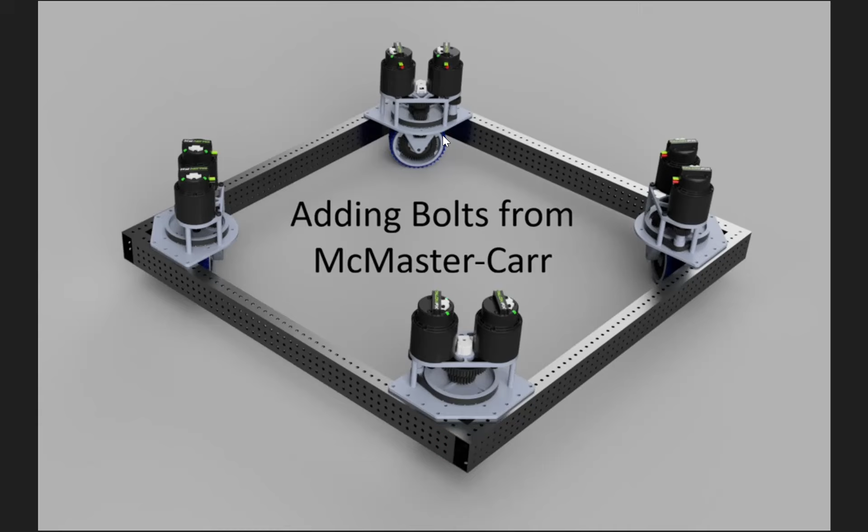This video, we're going to download some models of some bolts from McMaster Carr, which is the Bunnings of America, and we're going to insert these into the design to bolt these swerve modules into place.

At the moment, you can see our swerve modules are held in place. We can't move them around, but there's no bolts in this model holding it in. We want to try and model everything we're going to use in our robot to see whether things are going to get in the road later on.

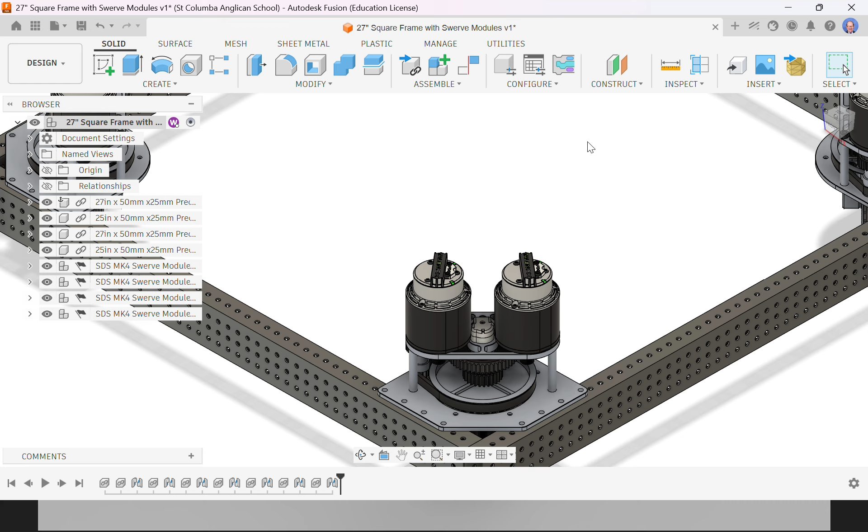So to insert a component, we go up to the Insert menu, and then we can go to McMaster Carr Component. This is where we can then filter down on these bolts. First of all, we need to know what type of bolt we actually need to insert here.

So we're going to go back to the Swerve Drive Specialties website, and we're going to find our swerve module, which is this one here. Going to see if we can find a drawing of this swerve module. There we have a layout drawing, PDF drawing.

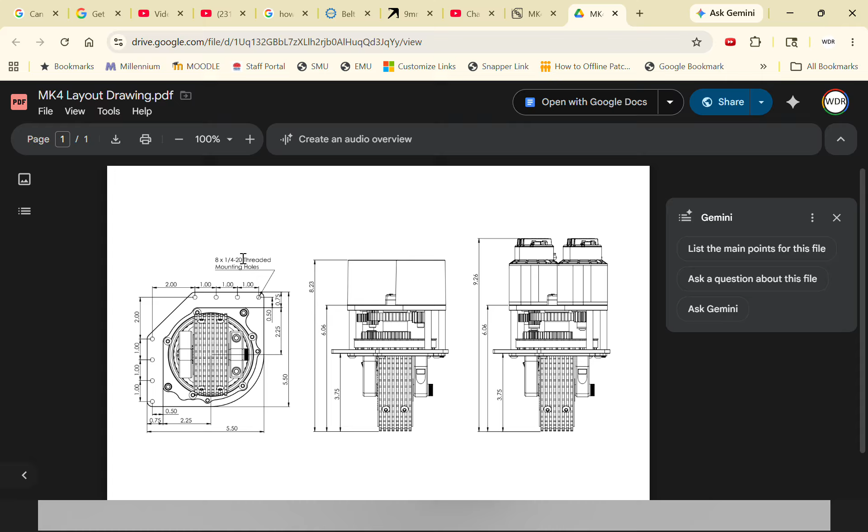And now I can see my holes across here. They're 1 inch apart, and they're 8 lots of 1/4-20. What that means is 1/4 of an inch wide and then 20 threads per inch. So now that we know that, we can search for that in our McMaster Carr.

Okay, so we want a bolt. We want an inch base bolt. And then this is the thread size, so this is where we have the 1/4 inch 20 - 1/4 inch in size, 20 threads per inch. The next thing down is the length of the bolt.

Now, I've found the bolt that we're going to use, and this is the bolt here. So this is a 2.5 inch long Phillips drive on the end of it, and it's a round head bolt. So we're going to search for that so we can get the CAD model of that in our design.

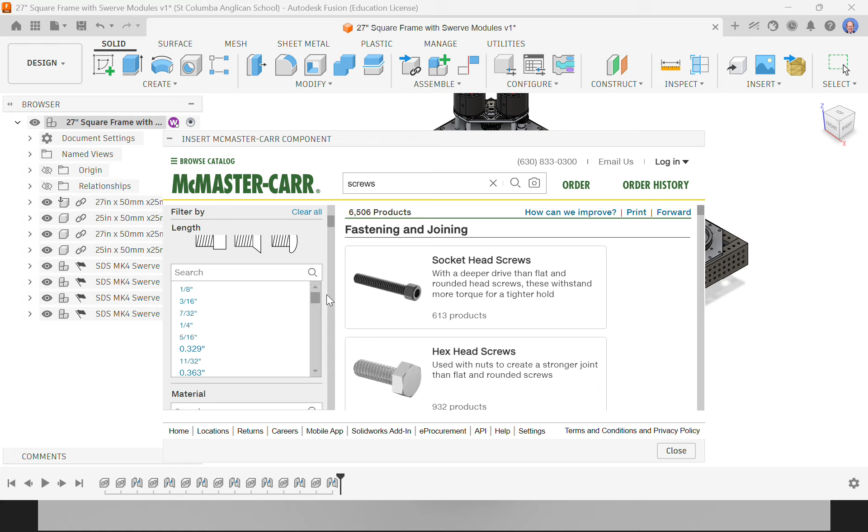So our length is 2.5 inches, and as we do this, the list on the left-hand side here gets smaller and smaller. But at the moment, that's still a lot of things in that list. So we're still going to keep scrolling down here and supplying more information.

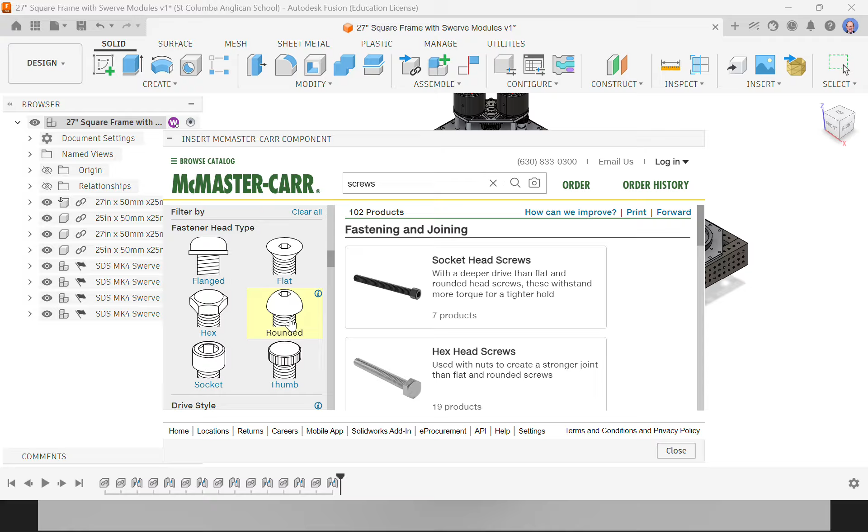Ours is fully threaded. Not sure of the materials, I'm not going to worry about that. It's a rounded head, so I'm going to click that one. It has a Phillips head, which is the screwdriver that goes into it, and it is a round head.

Okay, and now we're actually down to there's only one thing left on the left-hand side over here. And this is, if you were to buy them from McMaster Carr, you could buy a pack of 50 of these for $11.90 in US of A. But then we're not interested in buying them, we actually just want their CAD model.

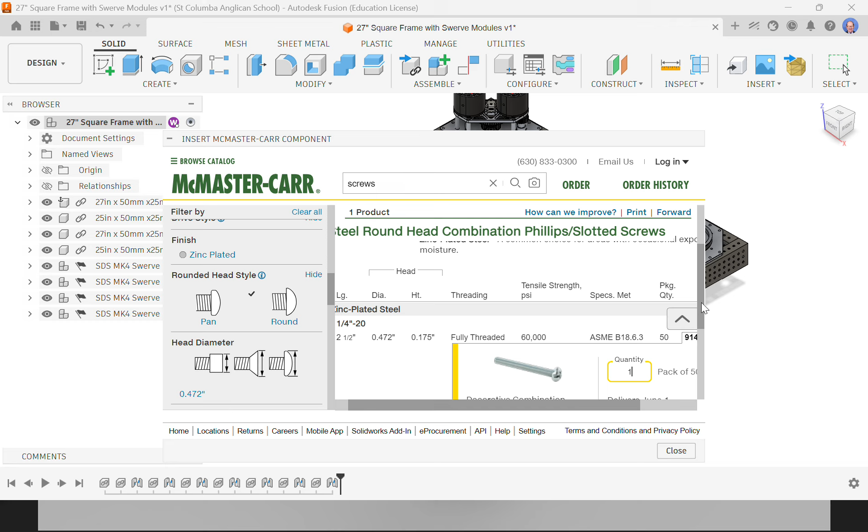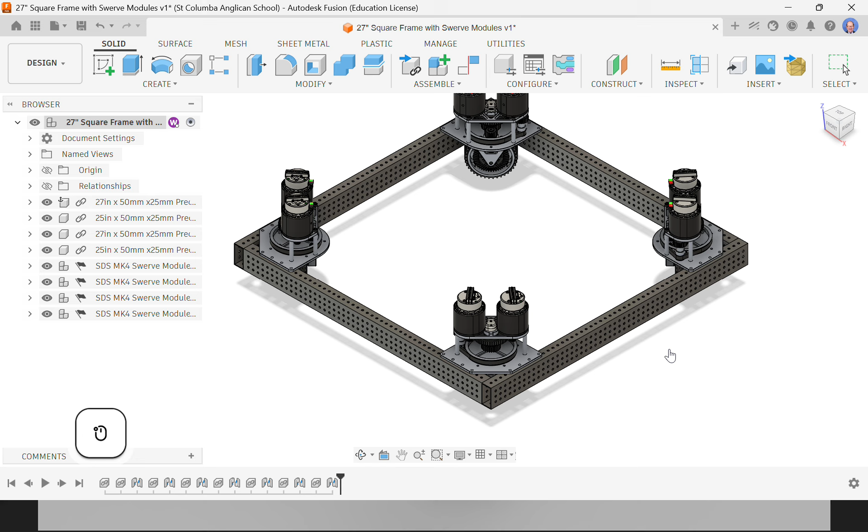If I scroll down here, I can see that there's a little drop-down box here. When you go into this the first time, it's probably going to read 3D SolidWorks here. We want to install a 3D step file - that's a generic file format used for CADing parts in general. So if I click download now, that will download from McMaster Carr, and it'll actually place the part, once it's finished downloading, directly into the origin of my design.

Now my origin's in the middle, that's why it's coming to the middle. These bolts are going to come up from underneath, so I'm going to turn that bolt over so that it's facing the right way, checking that this is 180 here. Then I'm going to go, okay.

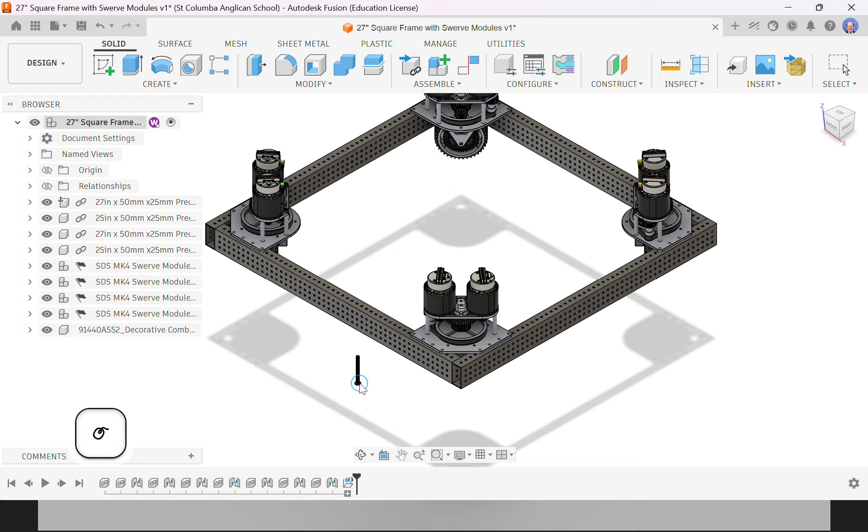Now I need to get this bolt into the right spot. It's got to go over here. Now it's impossible to move it around, so we're going to use the joint command to join this bolt into the right spot here. We've got to think about what surfaces on this bolt are going to be touching. If we zoom in here, we know that this surface here on our bolt is going to be touching on this face here. So that's where we're going to do the joins between those surfaces.

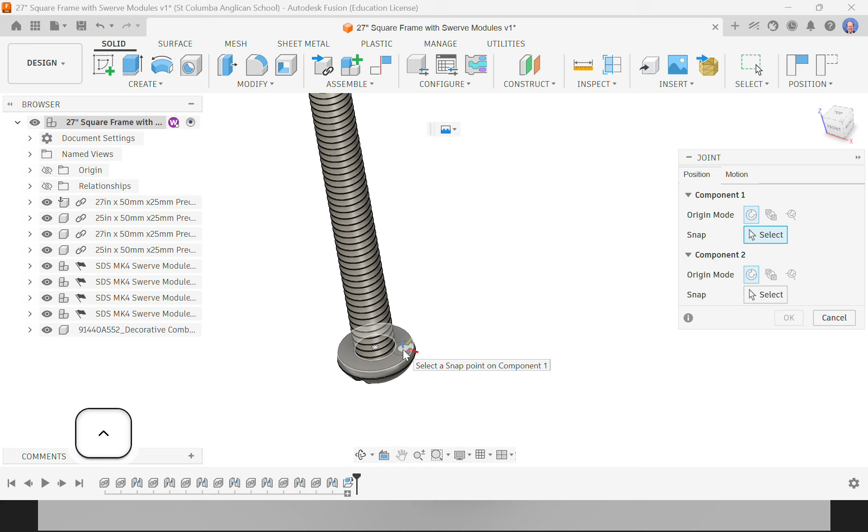So I'm going to zoom in here, and I'm going to do a J for joint. And then I'm going to come over here, and this is a typical example where if you try to go into the middle to click onto that thing, you lose it. This is why it's good to hold down the control key or the command key when you're out on the face, then go in and click the center of that.

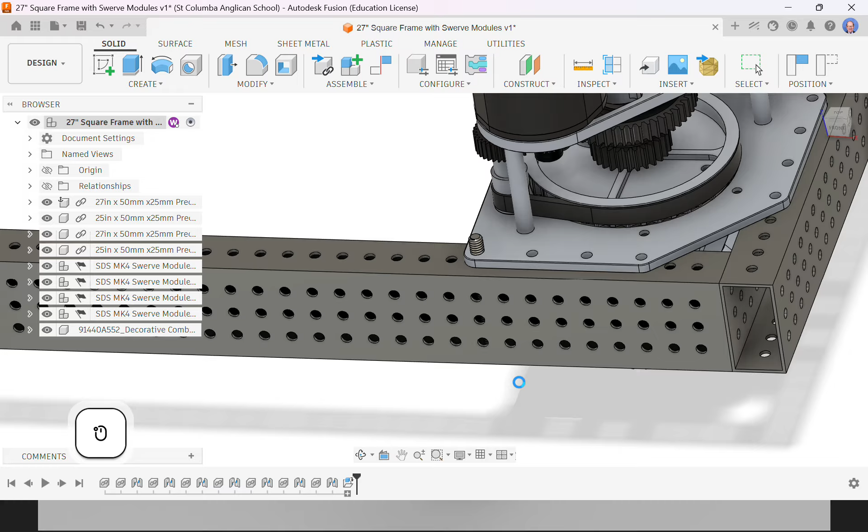So I want the center of that circle to be on the center of this circle here. So I'm going to zoom in here, hold control, and click there. And it's going to bring our bolt up and put it into place in our design and create a joint for it. Now clicked OK to lock that into place.

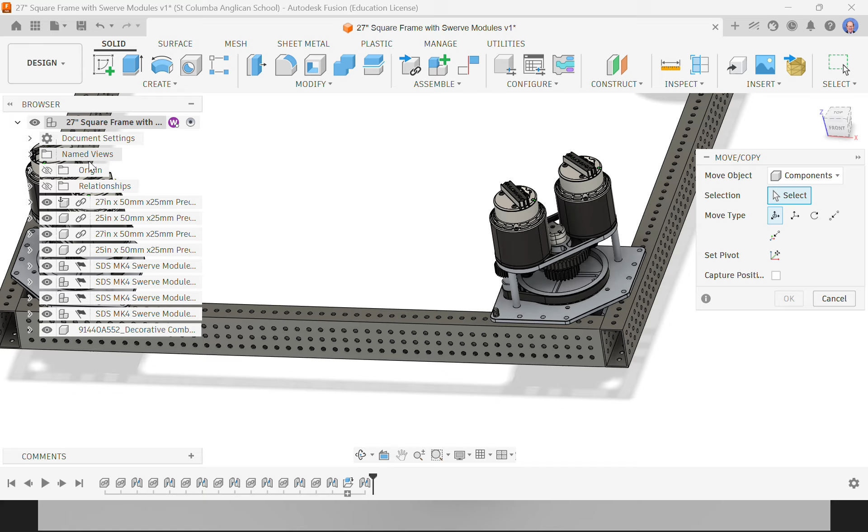Now I could go through that process a lot of times, but now that I've got the part, I don't want to have to go searching for it every time in McMaster Carr. So I can actually just create a copy of this part in the design now. So to do a copy, it's M on the keyboard, which is move copy down here. So I'm just going to press M on the keyboard. The thing I want to move is a component, because this component has come in as its own component over here in my document tree. You can see our 4 side pieces, our 4 swerve modules, and our 1 bolt.

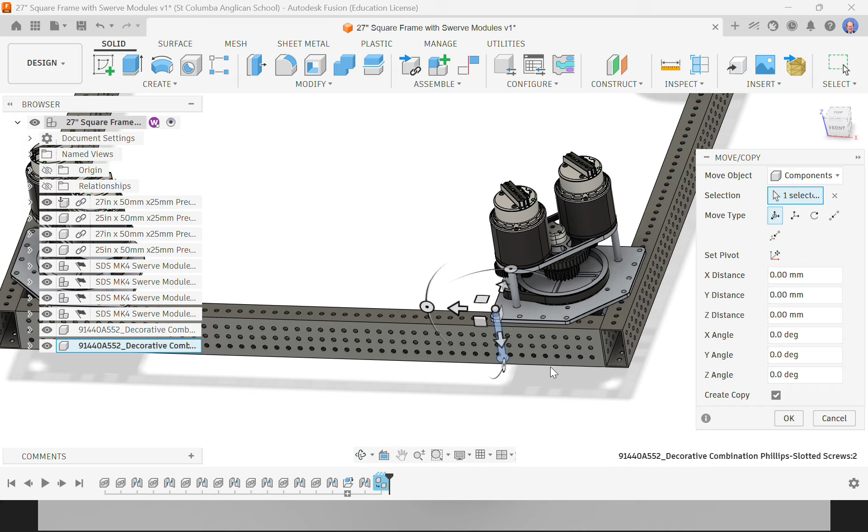Okay, so I'm going to click that bolt. It says 1 selected. Now, before I grab the thing and move it, I want to click create copy. It's important you do that before you move it, because once you start moving it, the create copy option disappears. So now that I've clicked create copy, if I grab this bolt and drag it this way, it leaves the original one behind and creates a copy.

Now, I know these holes are on 1 inch spacings. So that's 1 inch, that's 2 inches, and that's 3 inches. 75 mils is not exactly 3 inches, so I'm going to use the proper units and go -3 inches, which will put it in exactly the right spot.

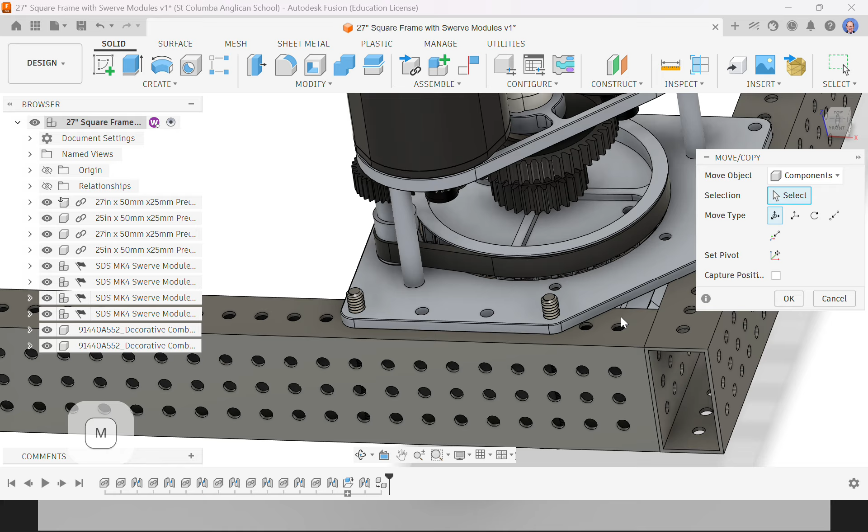Now I want to move copy this one again. I can move it 2 inches in this direction and then 2 inches in this direction to get it down here. So I'll do M for move, and just select my last component in the document tree. This is another way you can select parts instead of clicking on them in the drawing. I want to make sure I click create copy first.

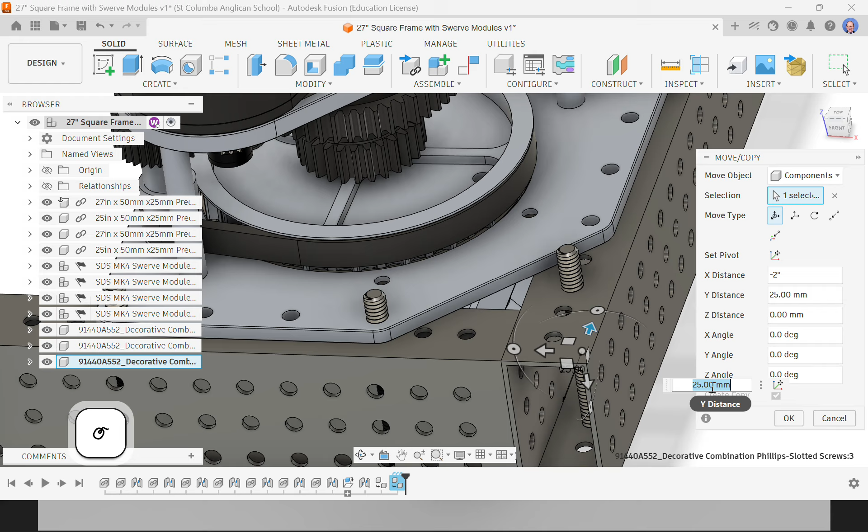Then I'm going to move this way, -2 inches. And I'm going to zoom out a bit so I can grab the other move arrow, start moving it that way, and type in 2 inches there. And that's moved to there.

Okay, and I'm going to move that once more. So M for move, this component, create a copy in this direction, 3 inches. Right, that's copied our bolts in, so now we have 4 bolts over here.

This one here we jointed right at the start. These ones haven't been jointed, so you can pull them out. I'm going to Control Z to put that back into place. But going around and joining every one of these bolts can be a bit painful, so I'm going to show you a new way to create a joint that's already got the parts in the right spot. It's called an as-built joint.

So if I go to Assemble and then say as-built joint, which is Shift J, it's asking which components I want to join, where they are. I want this bolt joined to this frame. Click OK. Now that one's locked in, it can't move, I can't drag it out. So I'm going to repeat that process.

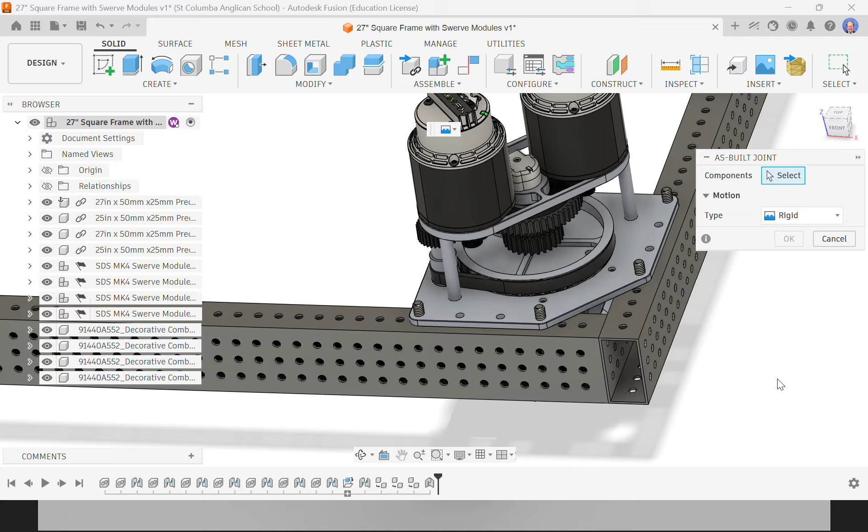A simple way to repeat is to right click and drag upwards, which repeats the last command. Now I want to select this component and this component. Right click, repeat as-built joint, this component, this component. Okay, that's put all those bolts in, and now they're jointed in place.

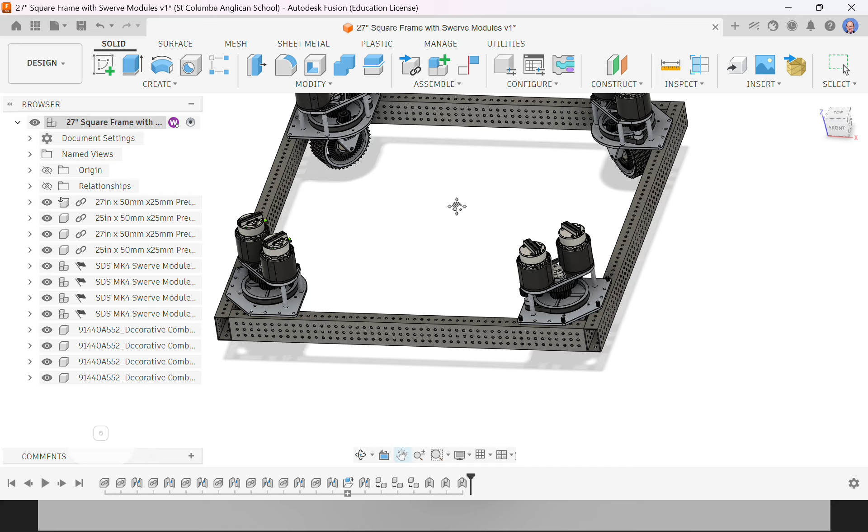I can't grab them and move them out. I need to get these bolts all the way around here. Now, I can actually create a pattern of these bolts, just like we did earlier with rectangular patterns. You can create a thing called a circular pattern. Even though this is a square, all of these things are 90 degrees out from each other around in a big circle. So I can say create a pattern, a circular pattern.

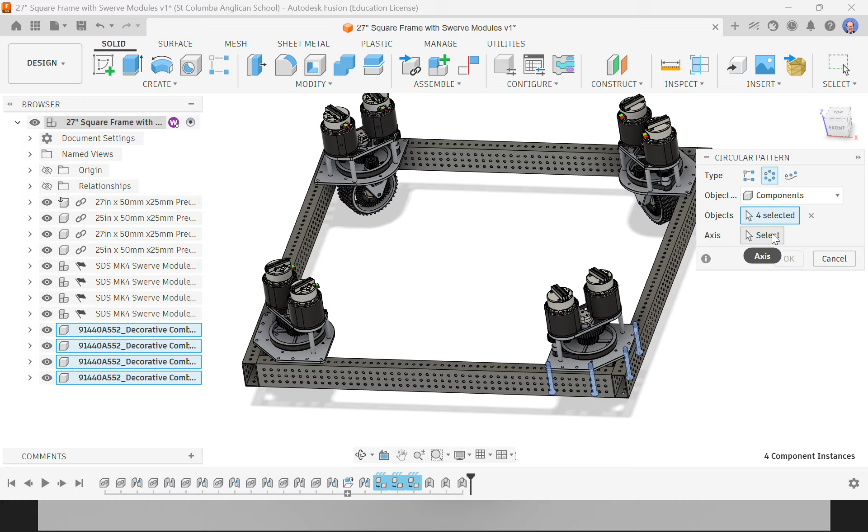The object I want to pattern are the components, and the components are these 4 bolts. I can either click them here in the model, or click them over here in the document tree. So that's got my 4 bolts to pattern. The axis that I'm going to pattern them around, so now I've got to click on axis to get the origin to show, and I want to go around that blue line there.

Now it defaults to 3 quantities, which hasn't got them in the right spot. We want 4 around our circle. Now you can see that's put all of those bolts in the right spots around our design. So I can click OK. But the patterning doesn't pattern the joints.

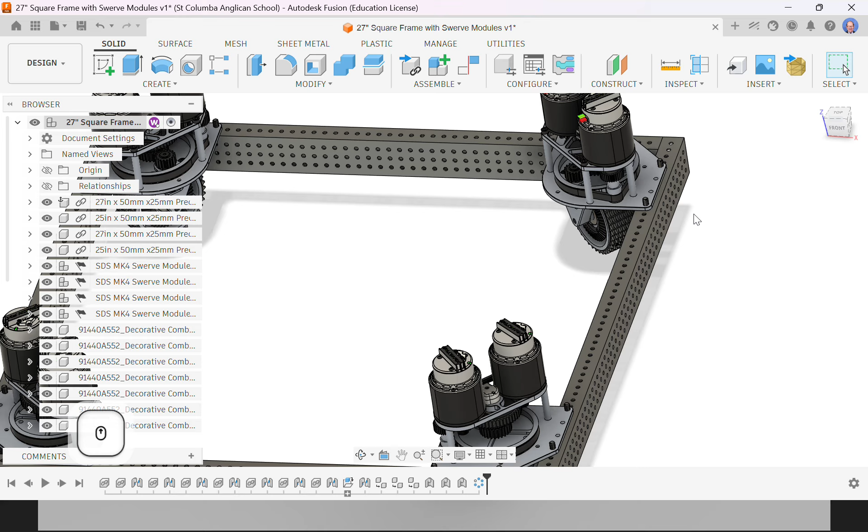So if I grab one of these bolts, fair enough, it moves out. I'm going to Control Z that back. Now we could go around and do an as-built joint for each of those, but I'm going to show you another way to join a lot of things together at one time. That's in your Assemble menu, and it's called a rigid group.

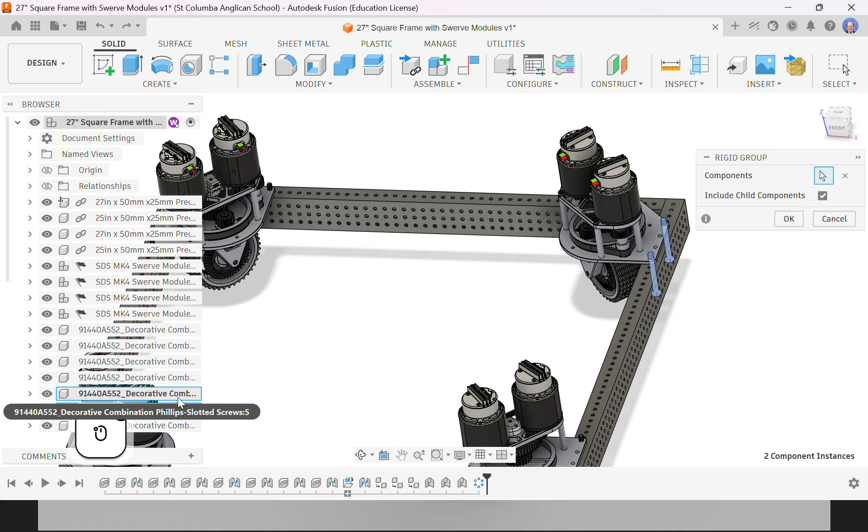This is for doing more than 2 things. So what I want is this to be in the rigid group, and this to be in the rigid group, and I can literally just click all of my items in my tree here. That's got them all, all the bolts rigided together. But I actually need to make them rigid to something in my design, so I'm just going to pick one of these pieces because that doesn't move. Then I click OK.

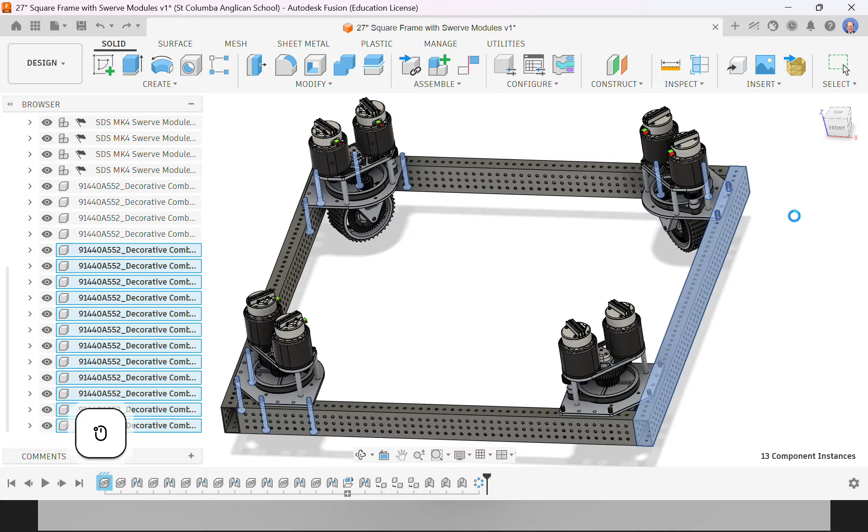So instead of having those joint origins everywhere all around my design, that's just done it in one simple operation. Now we have all of our bolts held in place. They can't go anywhere, and our robot is coming along.

So that's going to be the end of this video. Next, we're going to model up a belly pan to go on the bottom.